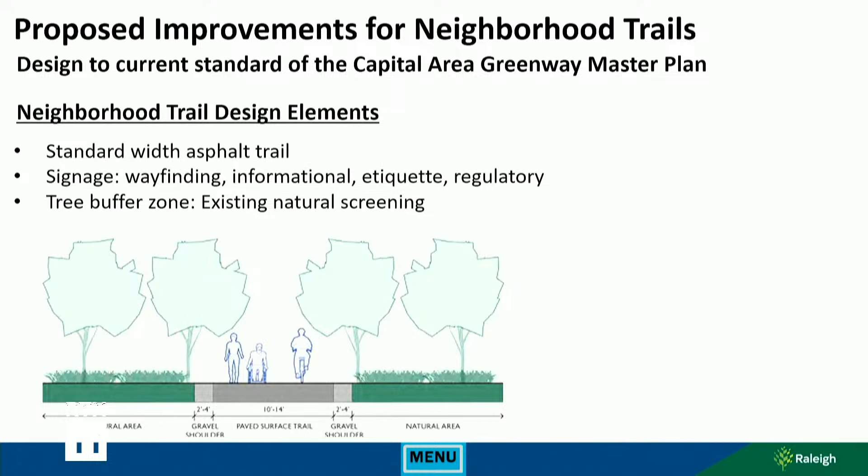So these are 2 areas that we're looking at a boardwalk. And the boardwalks that the city is using these days have the concrete decking. We're moving away from the timber decking and the timber planking that gets slick in the wintertime and with leaves. So that'll be like a floating sidewalk.

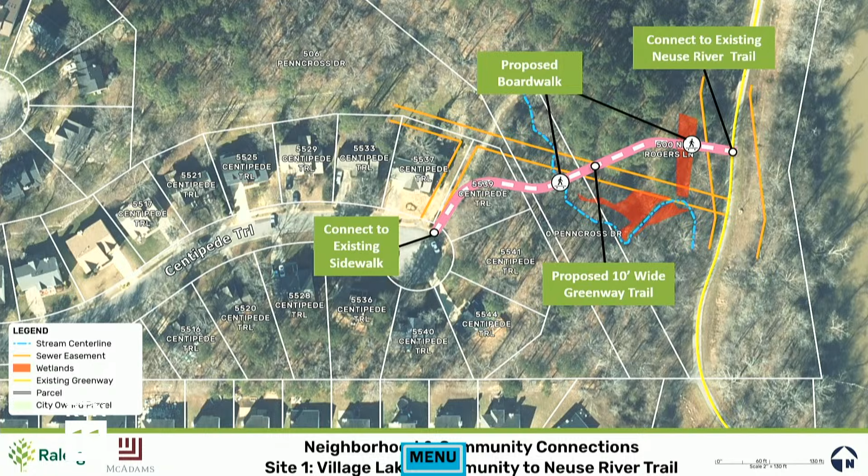Site number 2. This one is connecting to Marshlane Way and Barwell Road Park. So there's existing natural surface trails within the park itself. And then this connects all those residents in the community there, the Chastain community, with the park without having to go stand on the sewer line and kind of cut through the woods. So this will formalize that in addition to hopefully providing a little bit of stream bank stabilization along the creek.

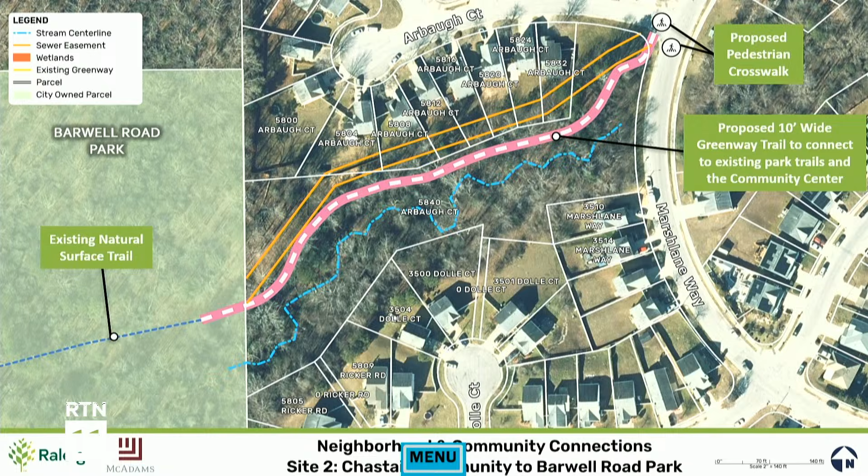Site number 3, this one is a very interesting connection between Southeast Raleigh High and Sanderford Road Park. There's a community center that a lot of high school students are currently crossing the road and going down through the parking lot at the church there, crossing a sewer line to get across the creek and up into the park. So we're going to try to give them a safer route that's paved that steers around the church so that there's not conflicts there.

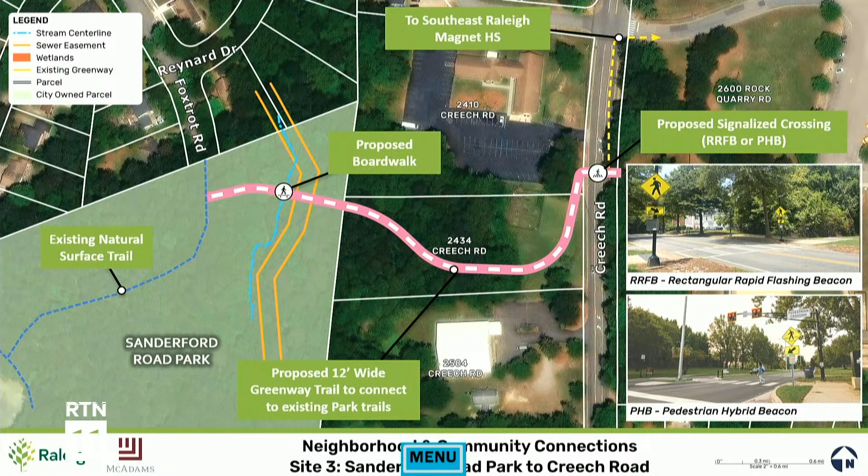And then also looking at a safer crossing of Creech Road. So what we're showing here is a mid-block crossing before the driveway of the church so that we don't have to come down and regrade their parking lot and their driveway. And that is up in the air between a pedestrian hybrid beacon or the rectangular rapid flashing push button sign. So current recommendation is leaning towards the rectangular rapid flashing per our warrants, but we have future meetings with transportation to talk through that and also talk with DOT.

So I'll turn it back over to Kimberly. All right, thank you. So now to talk about schedule and next steps. So through the spring of next year, McAdams will be finishing up the design and permitting the project. We expect construction to start in summer of next year, summer of '26, and last about a year. So between fall of '26 and fall of '27 is when the Greenway connectors will be constructed, estimated construction time. We are scheduled to go to council for their review on November 4th.

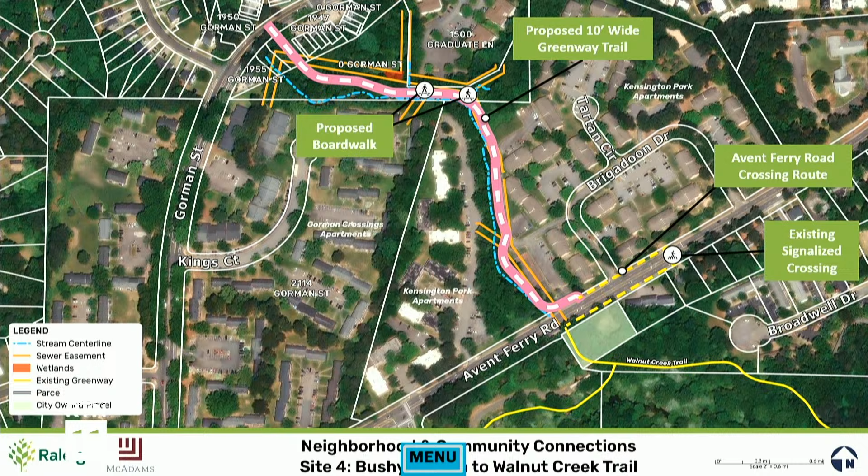And does anyone have any questions? Any questions for Kimberly or Graham from the board? Linda? The trail segment that's proposed to go to Gorman Street goes through existing parking lots, is that correct? You'll have to negotiate with the apartment buildings? Correct. So this area, we're in easement except for maybe around here, that area there. And as the...

Excuse me, could you use this, because I can't hear. Oh, I thought I was. Thank you. Can you hear it now? That's much better. Okay. Sorry. It's hard talking behind me.

When you build the Greenway through the existing parking lots, will you remove the asphalt and plant trees or provide some other sort of visual or safety screen to designate the Greenway, or will it be left open to minimize impact on the parking lot? That is a great question. So the reason that the trail goes through here is that blue line is the creek line. Right. There is a steep slope. We can't get it any closer to the actual creek. We're still within the corridor, but we can't get it any closer.

So on the east side of the trail, which is what you're asking about, we haven't determined the width of the easement yet, but within that easement, if there's any opportunity to provide any kind of buffer or visual screening, we will certainly consider that. The double orange lines are sewer easement. We obviously have to adhere to their regulations of not planting any vegetation within that sewer easement. So as we drill down to more specific design, that'll be addressed. Okay, I understand the constraints. So just any chance to break up asphalt without too much inconvenience to homeowners and provide shade would be appreciated. Great, thank you.

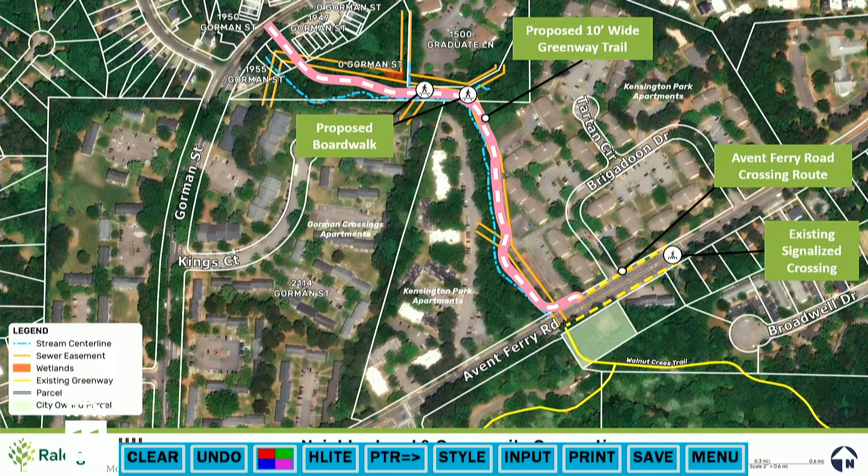All right, any other questions? Doug? Sorry about that, Linda. Planting on the sewer right-of-ways, does that include vines? Anyway, that's not my main question. We'll talk about that later, but I agree strongly with where Linda is heading, that this is one amazing job of Greenway locating. It had every problem in the world, and the design team really came through. We have a very functional pathway along that route.

The whole route offers some tremendous opportunities. There are places at the other end that are as beautiful as you'll find anywhere on the Greenway. The part you outlined back there is some of the worst places you'll ever find on the Greenway. So it's going to be a big challenge, but it's also an opportunity. And I was out there with a fellow who's a stormwater professional, and he was the one that pointed out to me just how amazing this job is. And it's a fantastic platform to seize these opportunities, both the ones where it's pretty nice and the challenges of this place here.

Vines may be part of the screening thing. There's lots of reasons to explore, but it's not just the natural beauty options. There are possibly other options centrally focused around tree planting and the city's tree planting that they're considering now. So I had sent a memo around suggesting that we have a conditional approval, but it wouldn't be necessary if we'll do a couple of other things, which are, number one, give us a little idea of what room is left for planting on that route. I mean, it's going to be very little, but confirm that.

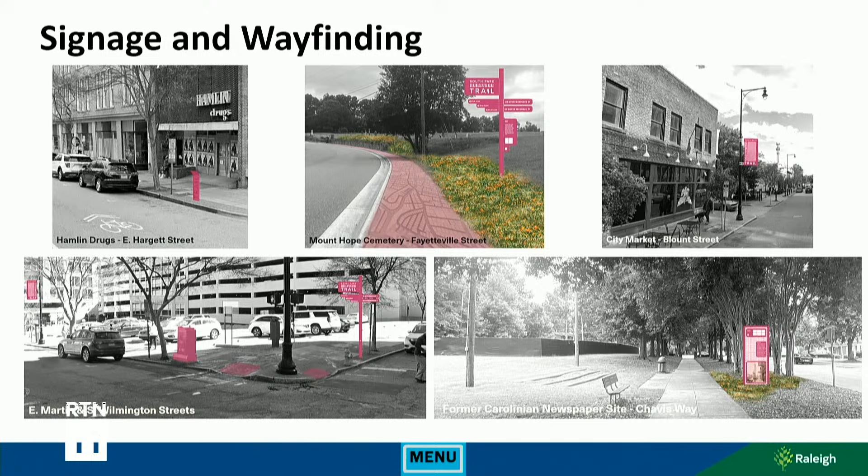So here we have several renderings of the signs overlaid in actual streets. The pink, by the way, is just to match my outfit today. It is not indicative of the final color for the signs. We are too early in the process for that, so the final colors will come down the road.

We also have interpretive elements along the way, many different kinds. Here are some examples. We have storytelling benches, which will have etchings of images or text to help build context in the area. We are looking at a natural stone bench along Chavis Way. My personal favorite is the viewfinder, which will have a piece of plexiglass that's going to be etched, and you'll be able to look through it and see what an area looked like in the past.

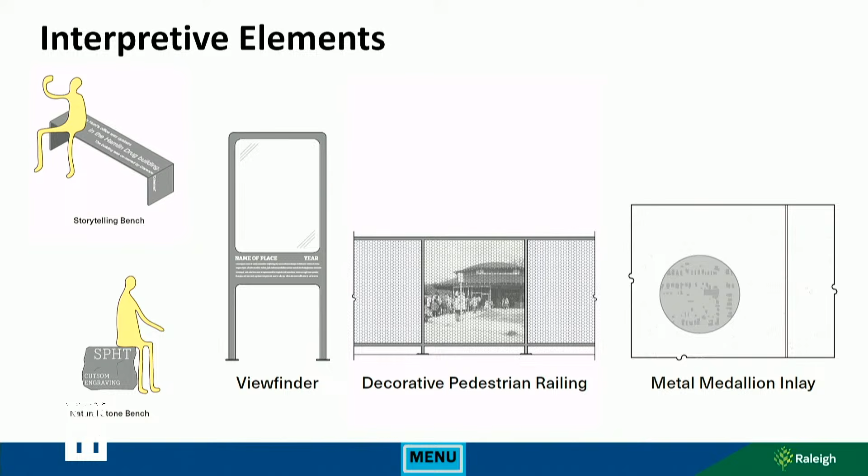We'll have some decorative pedestrian railing over in the Chavis Park area. And then we'll also have metal medallions inlaid in the sidewalk. These are going to be about 2 feet in diameter and have different pieces of information etched into those. Here we have those also, pink to match my outfit, but these are an example of how these could look.

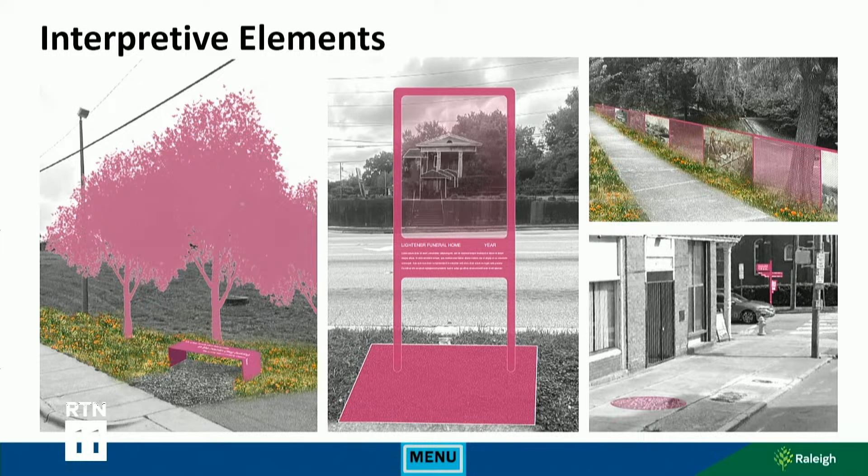I will point out here, you see some pink trees, and I will take this opportunity to note that we are adding some natural elements along this route. Right now, it looks like we are adding about 17 canopy trees along the route, and another 10 smaller, more decorative trees. And then we will have meadow planting, and we're looking into other garden opportunities.

Estimated schedule. So we are just finishing up schematic design. Design development would start this fall and run through next spring. This fall, we would also start our National Environmental Policy Act, or NEPA, environmental assessment preparation, and that could potentially run into 2027. Our construction documents and permitting would happen through the summer of 2027. We would bid and award contracts during the summer into the fall and start construction in fall of 2027. And that would run through the spring of 2029.

There are some significant schedule considerations in this. We have federal, state, and City of Raleigh permitting to, I'm not going to say contend with, but to make our way through. And we also have over 3 miles of project. I believe the specific number is 3.36 miles of linear project. And most of this work is in the right-of-way, which means we are going to have to coordinate with multiple entities, NCDOT, Duke for 2 of those. And we're also planning to be very conscious of the residential property coordination to have the construction impact the least that it can be.

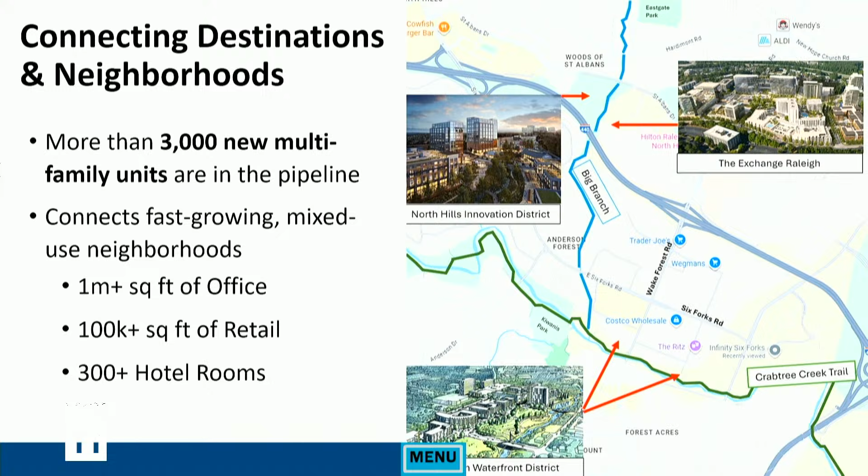And then to go into this project specifically and where that $5.5 million that this is budgeted towards will go, it's important to just make the distinction that 1A and 1B, that money goes toward design and construction, and then segment 4, design and construction. The other segments for that full 3.5-mile trail will be funded in various other ways. So public-private partnership through exchange for segment 3.

Segment 2 is that multimodal bridge over 40. Segment 5 is a Raleigh DOT project through Quail Hollow Drive. And then segment 6, we're doing a feasibility study right now, but there is no funding for design and construction. So this is kind of a mix of different agencies, different private partners coming together, which is exciting.

And it was discussed, the multimodal bridge over 40, and that's really important. This project has actually stimulated an expediting of that project, which is exciting. That will be at 30% design in March 2026. Funding from another Six Forks project was pulled over here, so helping to advance that project because it is a key connector here, and our intention is to build this, help motivate that project, and help it get federal, state funding as well as city funding.

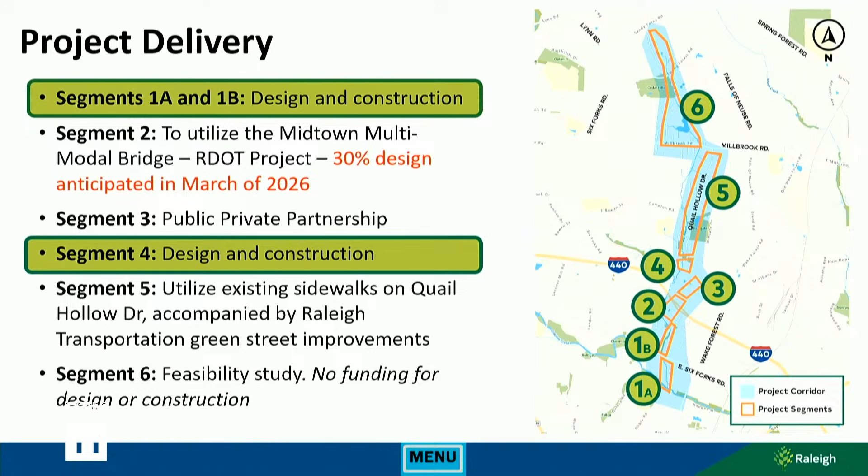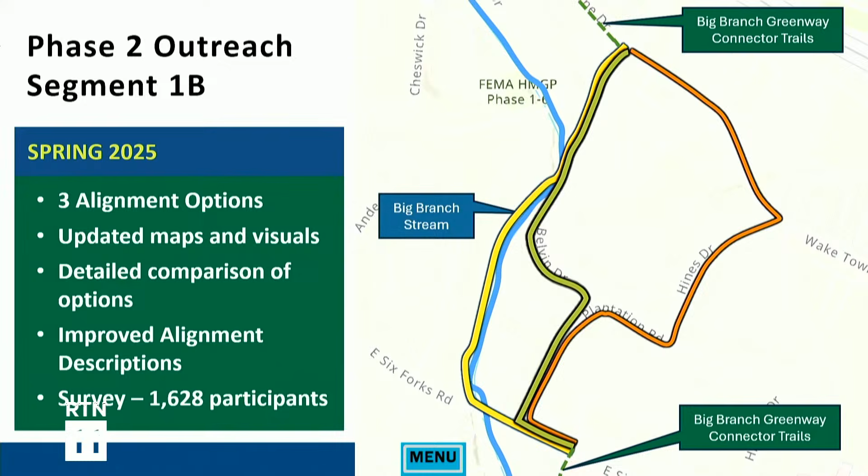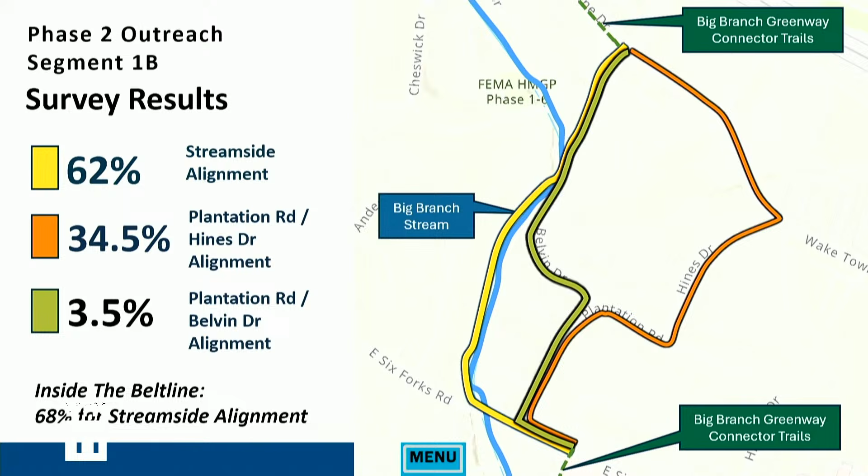And 1,628 participants were surveyed and voted and supported that streamside option. When we talk about other options being more affordable, the public has spoken that this is the option that they really cherish for various reasons that we'll talk about throughout this proposal. But it was pretty resounding to vote for that.

And then in terms of the evaluation criteria, it's been talked about, we try to be very sophisticated in the way we approach each of these projects, work closely with Stormwater, with Raleigh Transportation, with Real Estate, with the City Attorney's Office. These are the core criteria by which we evaluate our greenways in this project. Much of this comes from the comp plan, the Greenway master plan.

So safety is absolutely critical, accessibility for all users. So that's not just walkers, not just bikers, that is wheelchairs, that is strollers, that is dog walkers. A lot of people use our Greenway, and this one in particular will be very popular. Stream bank protection, environmental investments are critical. Connection to nature. Preservation, we want to limit the removal of large trees. Proximity to homes. Constructability, land acquisition costs, utility relocation costs, and then of course popular support.

Community engagement is really critical to us, and the votes we hear from the public are very critical in guiding which paths we choose. So with all that in mind, as you know, the alignment that we strongly recommend is the streamside option, because it scores very well on nearly all of these criteria. Safety, we have limited interaction with vehicle traffic and driveways, flat grades, good straight sight lines, direct route.

The environmental investments, our partners at Stormwater will be contributing $1.2 million for stream bank restoration in that Big Branch, and we'll talk a bit about why that's so important. In terms of public support, 62%. We don't want to minimize that. That is really critical, that 62% support.

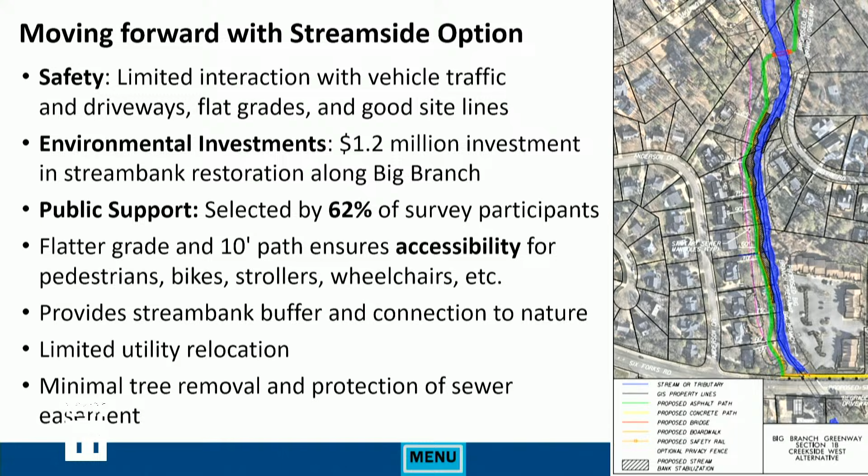A flatter grade makes sure that it's more accessible to strollers, to wheelchairs, to people walking their dogs, and everyone else. Provide stream bank buffer and connection to nature, limited utility relocation, and minimal trees removed, as well as protection of sewer easement. And this one is critical, the protection of sewer easement. You'll kind of see the before and after.

The sewer line was replaced here over the last couple of years. There had been significant vegetation in that corridor. Many of those are kind of large, deep-rooted trees, which are not permitted in sewer easements and can puncture that critical infrastructure. So this path will not only protect the stream bank, will not only bring stewardship and maintenance to that stream bank, but also protect critical infrastructure and our sewer line. It makes an appropriate path. We'll also, of course, have lots of native plantings and native flowers in that path as well.

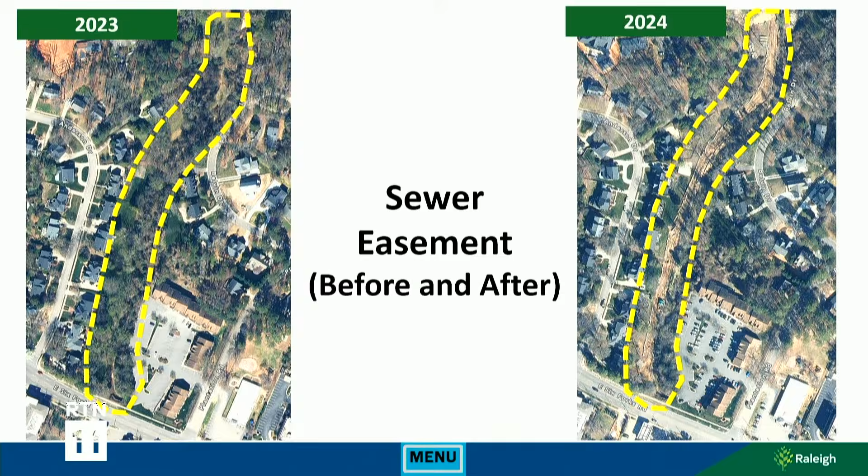And then the alignment alternatives, and we'll go through several. So Plantation and Hines, this came from the online survey. Plantation and Belvin from the online survey. Anderson Forest sidewalks, we've heard from the board. Industrial Drive and Wake Towne from citizens. Anderson Drive and Six Forks from citizens. And then this Streamside East came from a Parks Board member as well as a visit to the area.

First, Plantation and Hines. One of the first reasons just to elevate that's not here is it was not the most popular route when it was voted on by the public in a very large survey. It is a steep hill up Plantation, so that's real accessibility issues, crossing lots of driveways, and not just driveways, but driveways that have a very steep pitch, so the sight lines coming out of those driveways are quite dangerous. Costly retaining walls needed, proximity to homes. Because the street is so narrow, if we were to build a sidewalk there, and this is not even a full Greenway path, but just a sidewalk on that street, we'd have to eliminate all on-street parking so that fire trucks can come through. So that's a serious issue as well.

And then property acquisition and utility relocation. We've talked about that extensively, but anytime you're dealing with Duke Energy and other utility relocation, it adds a lot of uncertainty to a project. And then, of course, the stewardship is important, 17 to 22 trees removed for that route.

Plantation and Belvin, very similar, scored even lower in the public survey. Steep hill, both up Plantation as well as down Belvin. So the accessibility for strollers, for wheelchairs, for others is very limited. 8 dangerous driveways crossed, very close proximity to homes, 20 feet at some times, elimination of all on-street parking, significant property acquisition, utility relocation, and a lot of trees removed as well.

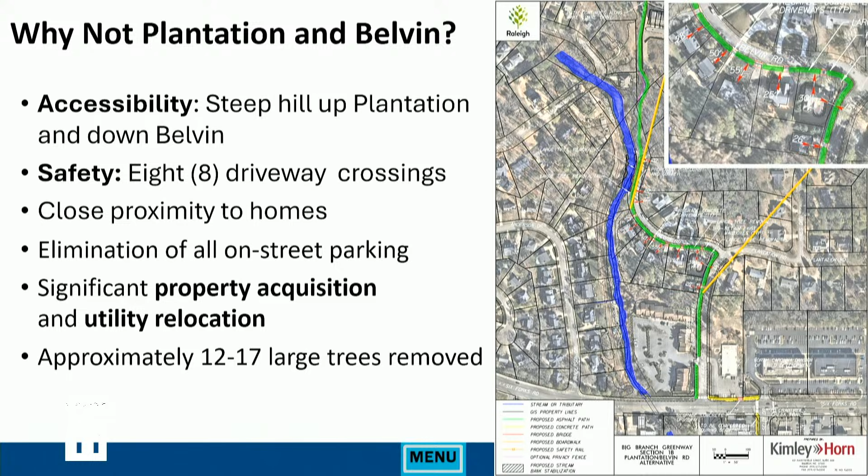This is a new one, and it's kind of an important one to look at. Anderson Forest sidewalks were discussed as an option. The key one here is really the constructability. You'll see at the inset, those driveways are very tightly connected to one another, are very close proximity to each other, so there's just fundamentally not room to put a Greenway path through those driveways. We would have to go up a driveway, eliminate access for that home, and it would likely have to be a total taking on that home. So there's just fundamental constraints when it comes to how close those homes are, but then also the driveways are actually pitched right next to each other.

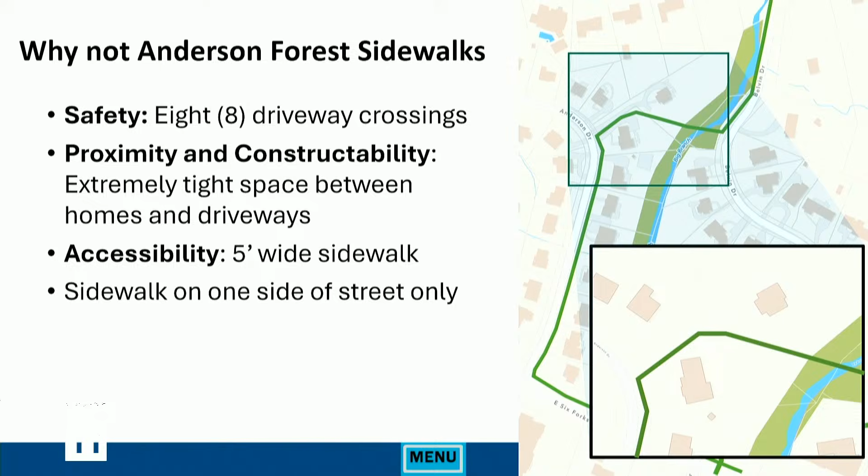Also, just on the accessibility side, it's a 5-foot sidewalk. So when we think about wheelchairs and strollers and dogs and bikes, that would be a very narrow path. There's only sidewalk on one side.

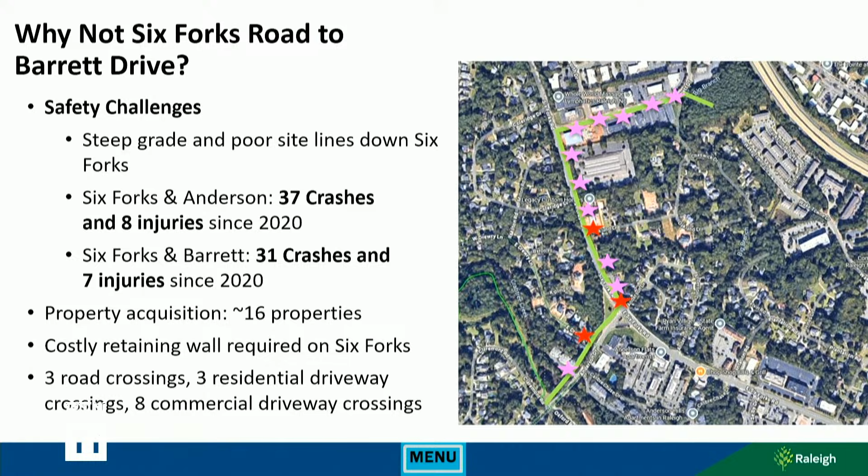Coming on to the on-street options, I think we've heard a lot from people today about Six Forks Road being extremely dangerous, and the numbers bear that out. 37 crashes on Six Forks and Anderson over the last 5 years, 31 crashes and 7 injuries on Six Forks and Barrett. People move down this road like an expressway. It is quite steep and also winds, so the sight lines are not strong. So if you have a bike going up one way and a bike going down the other way, there is a real opportunity for collision unless we make a very wide path, which we would do. That would entail property acquisition of about 16 properties, costly retaining walls on Six Forks, and multiple road crossings and driveways. We would like to stay off Six Forks for obvious safety reasons, for site acquisition, for utility relocation reasons. And similarly, Industrial Drive and Wake Towne.

Also, on Wake Towne and Wake Forest, that intersection specifically, 84 crashes and 21 injuries. That is one of the most dangerous intersections in the city. It crosses 15 commercial driveways, including Costco. There is a bike path on Industrial, but the sidewalk is interrupted on Industrial. There's no bike infrastructure on Wake Forest or Wake Towne. And specifically, RDOT has recommended that we build a bike bridge over that 7-lane Wake Forest Road because it is so dangerous. That would be up to $4 million, which starts to get prohibitively expensive. There's also a lot of property acquisition and utility relocation associated with this one.

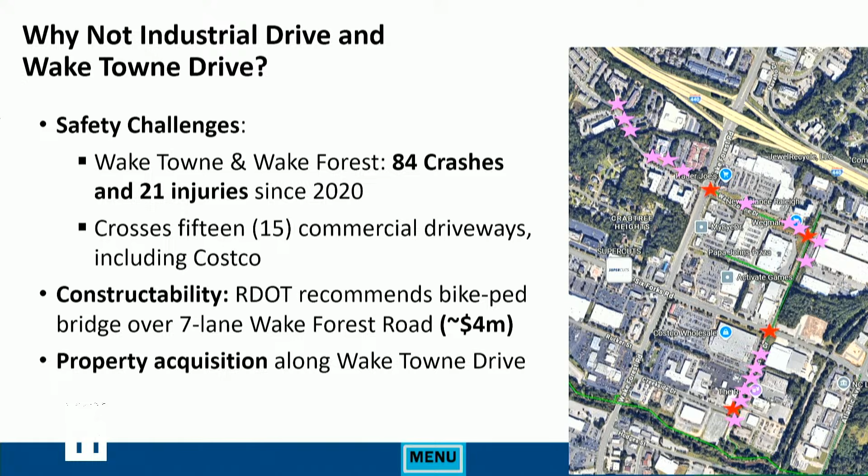And now getting to Streamside East. I think after our site visit, there was some popularity around this route specifically, so we wanted to go into it. I think we came into it with some optimism and some hope, but it really is the pinch points which make this, unfortunately, impractical. The path would be just 10 feet from the closest home at the end of Belvin.

We would also need to build, because it's a steep stream bank and because the home is so close, a boardwalk up on top of that house that is just 10 feet away, so you'd have an elevated boardwalk. In general, building that kind of structure in the stream bank is not recommended in terms of maintaining the stream bank, but also we've seen on Crabtree, boardwalk structures like that have collapsed.

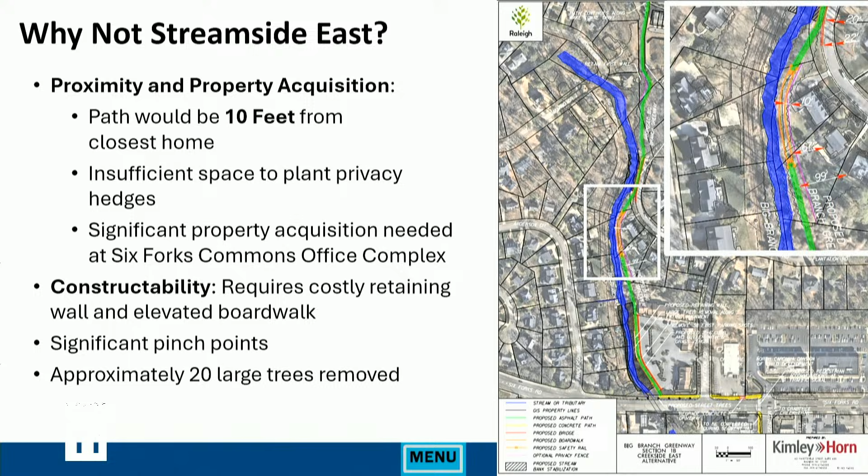We've had to abandon it and move to an on-street option, so building that infrastructure to only see it be kind of worn away and to damage the stream bank would be obviously a poor use of our funding, and just general constructability, costly retaining walls, elevated boardwalk, significant pinch points, and approximately 20 large trees to be removed on that path.

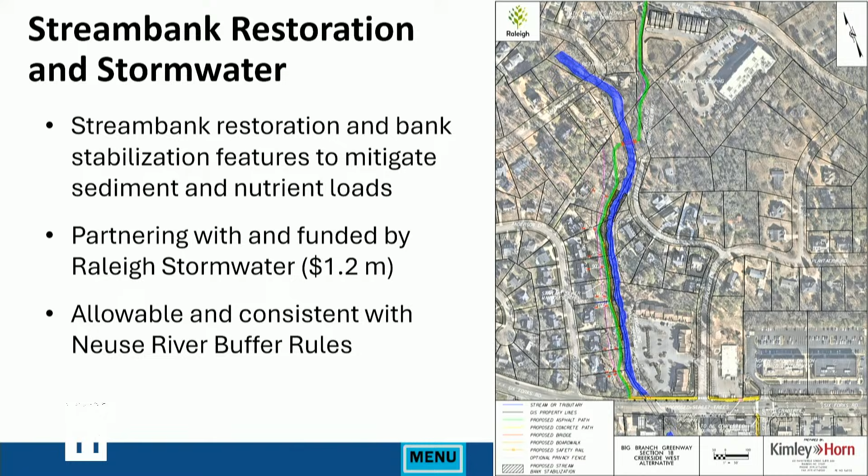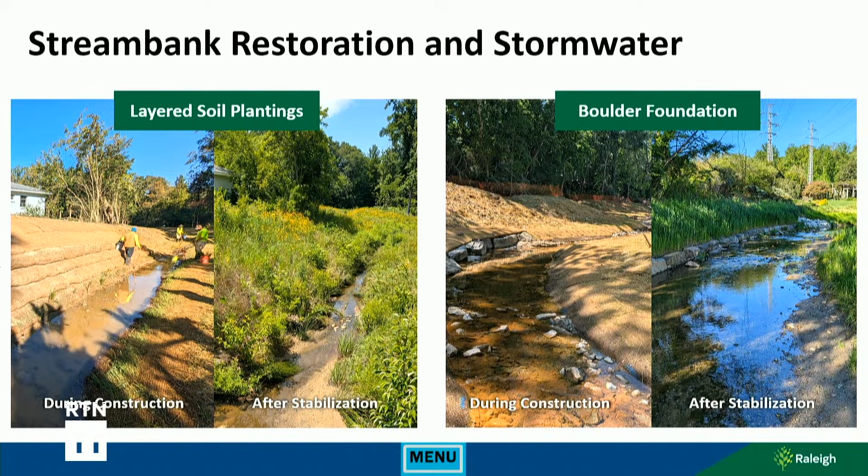And then moving forward, and these are important. I really want to talk about all the implications here. Obviously, we want to work hand in hand with the community, whatever we do here, and make this the best outcome possible. In terms of stream bank restoration, putting $1.2 million investment into that area is going to be really important in terms of restoring the stream bank after flooding, after construction projects, and that is allowable within the Neuse River buffer rules. Wayne Miles from Stormwater is here to talk more about these elements. This is the type of investments we would make, which we think will make a really important difference in restoring that stream bank.

Privacy and safety, and this is obviously a really important one. There's privacy concerns from the homes adjacent to the alignment. Impermeable fencing would be allowed here. Flood-resistant privacy landscaping is allowed. The homeowners could put this on their property. We would reimburse them. We're very happy to work closely with the homeowners to make sure that this project is as acceptable as possible.

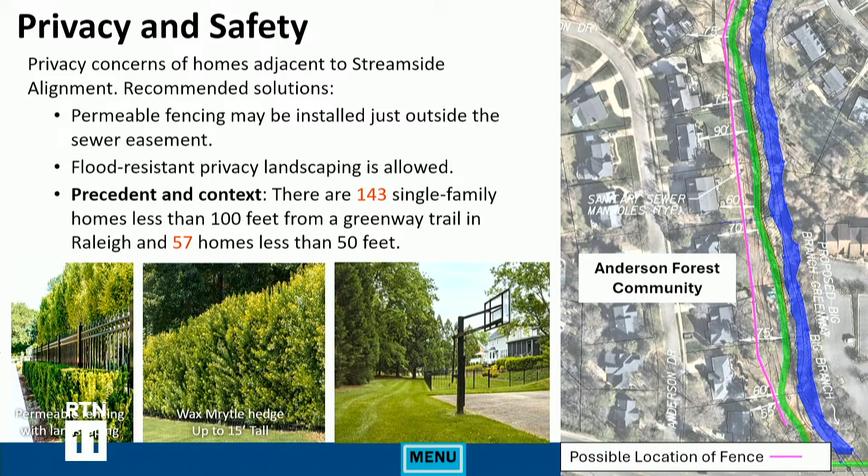And it is important for just precedent and context. Some of these homes, as you can see, are 55 feet, 75 feet, 90 feet from this path. We have 143 single-family homes within 100 feet of the Greenway and 57 within 50 feet. That's just single-family. When you have multi-unit, when you have business, it's a lot more. But this is not without precedent to have homes even far closer to the Greenway and still maintain a great experience.

And then another one on safety. Obviously, you've heard a lot about crime. There's been numerous studies over the years, including many centered on Raleigh, that there is not a correlation between crime and greenways. In fact, it's quite the opposite. That said, we take this issue very seriously. We have a Greenway unit that is devoted to the Greenway, and they're actually increasing to 2 squads. That includes 1 sergeant and 3 officers in the near future. So, Ian, I know that you've talked about it in the past, but we are looking at hotspots along the Greenway and making sure that our RPD team is devoted to those areas, because it's extremely important to us that we maintain safe greenways.

And then the flooding issue has come up a lot, and I also want to just take that head on. We do have a very sophisticated flood early warning system using data collection, weather forecasting, flood modeling, so that we can identify when floods are coming before they arrive, and close very vulnerable sections of the Greenway if necessary, if a big flood is coming. We have 33 staff members on our Greenway maintenance team. After floods, they clear away the area, but also doing that stream bank restoration, also doing plantings, also being stewards of the stream bank, as well as the sewer easement and of the whole property, is really critical.

And lastly, as we all know, a large majority of our Greenway system is within flood areas, and we've never seen someone swept away by a flood in all of our 40 years. And I think a lot of it is because we have a lot of resources devoted to making sure that these areas stay very safe.

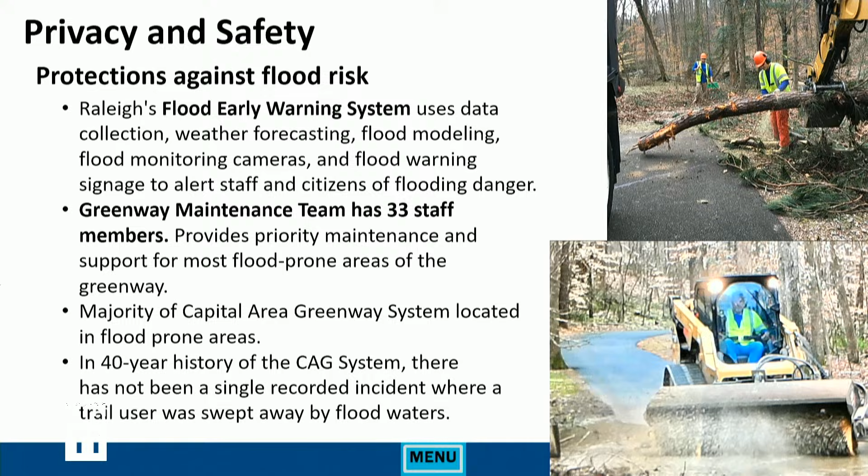That would be needed. Over the last 4 years, the city has filed for condemnation about 120 times from projects large and small, including 5 sidewalk projects, 1 bus shelter project, other roadway projects. So it is not uncommon to use condemnation, but as it's been said, we like to do it with a scalpel, not with a hammer. We try to be very careful about it, and purchasing an easement is the appropriate way to handle it in this area, but we will leave that to negotiation and to others moving forward.

And then lastly, the construction costs. The estimate for this section, which is 1B, is a little over $3 million. With markup, because that estimate came about 6 months ago, we could probably add about 2%. As we mull over these options, Section 1, $900,000, Section 4, about $900,000. So that does not include design, and it does not include acquisition, but that number is within our $5.7 million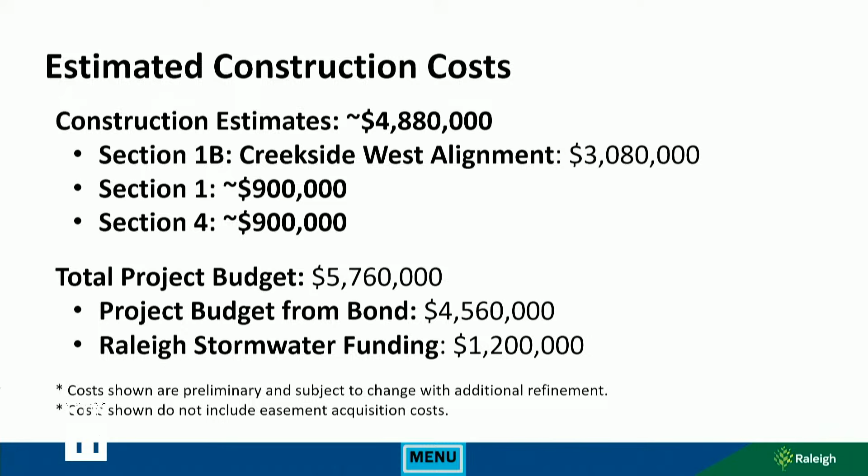So I look forward to hearing your questions, and hopefully I've addressed a lot of concerns. And again, thank you so much. We really think this is a high priority project, and love to hear what you have to say. All right, thank you, Adam.

Before I open this up for questions, just as a procedural item, I want to mention to the board, a lot of folks have come to me and asked for an opportunity to discuss at the table. We'll have an opportunity to discuss this basically at the time where we would normally entertain a motion. So the way this will proceed is that right now, let's focus on asking Adam any questions that you have. After Adam has answered all those questions, then I will open the floor up for the board to openly discuss things that are of concern to them. And then at that point, we can take motions. It can be a motion that's suggested by staff. It could be a different motion. So at this time, any questions for Adam?

Ian. Thanks, Adam. 2 questions. One, for both this project and any others that are by flood areas, are there any plans to include a visual depth marker? So somebody who doesn't have a phone, who didn't check the forecast, can see, yes, that greenway is 6 inches or a foot deep in water, I shouldn't go through. Yeah, we include signage as part of that system. Using our existing staff and other staff in the city, we are putting out signage saying, don't pass through this area. So we are proactive in marking areas if there are storms coming.